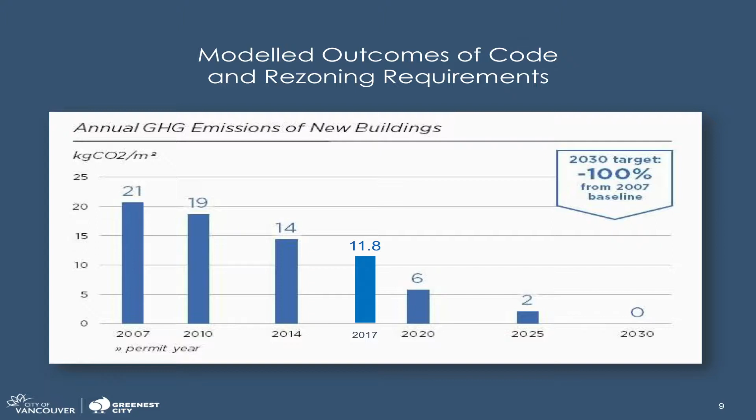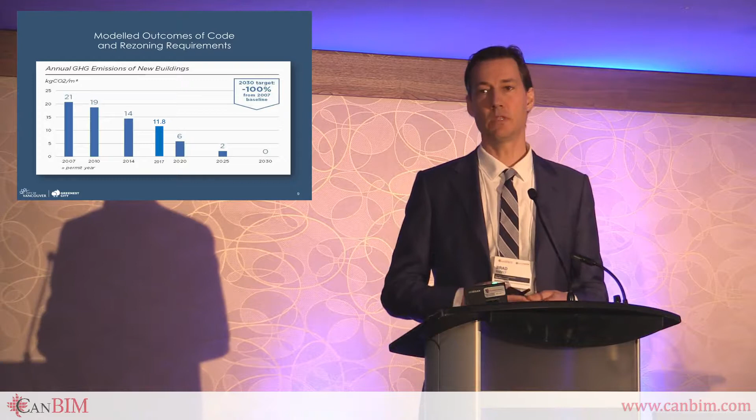And I'd say we learned a bit through those changes. Those were primarily regulatory changes that didn't have some of the support that we're hoping to roll out through the Center of Excellence and other tools, which I'll speak to shortly. The 2017 rezoning policy, which I'll describe a little bit, brings us down below 12 kilograms of CO2 per meter squared, so we're getting closer already. So we're tracking down already. It's really how do we continue that, and we're undeniably getting into the tougher stuff now. I'd say we've knocked off kind of the easy stuff. We're getting into tougher stuff, but we are on a trend at this point.

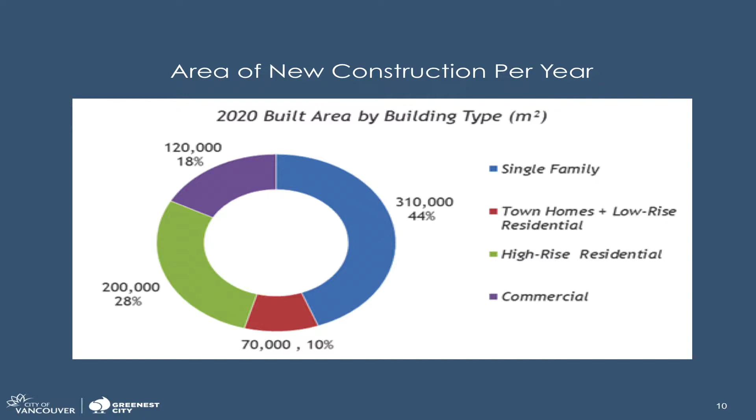That will change over time. As we densify, that's going to decrease, but it's worth noting that it's there today. 10% is low-rise, 28% is the high-rise tower construction that we're seeing, and then commercial, and I believe that includes institutional, is the last 18%.

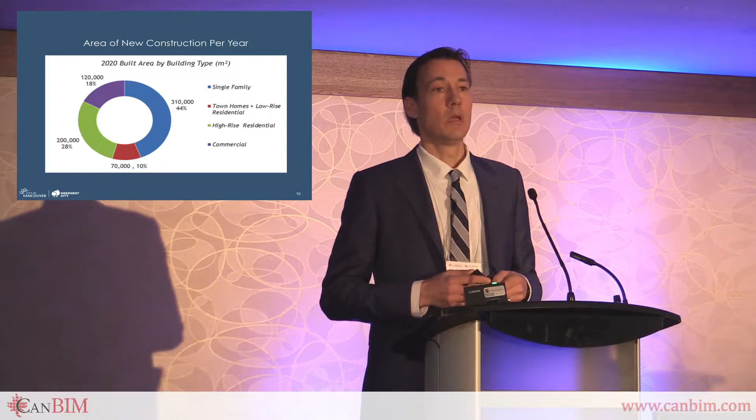We've seen innovation in commercial, I think, happening for some time now. I think owners and tenants are demanding it. People recognize the connection between productivity and a good building. People want to market that building to their tenants. So I think commercial has been progressing quite well in terms of its innovation. The taller high-rise stuff has not.

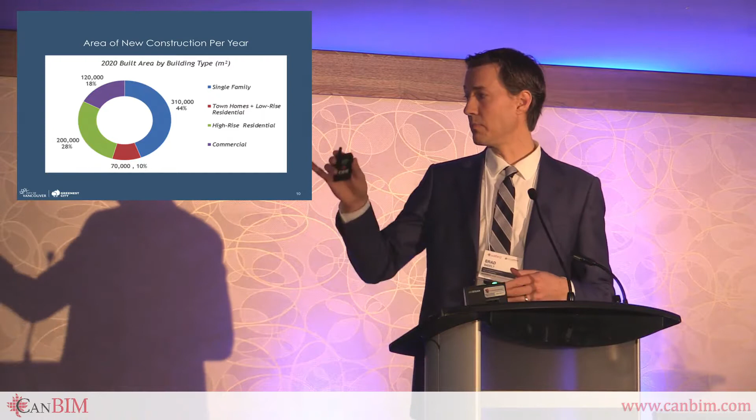There hasn't been that marketing ability with high-performance tall buildings, and so there's a real innovation gap in probably 38% of that circle, the low-rise and high-rise residential. There's a huge opportunity for BIM there. We need to have BIM if we're going to hit the targets, particularly on those built forms.

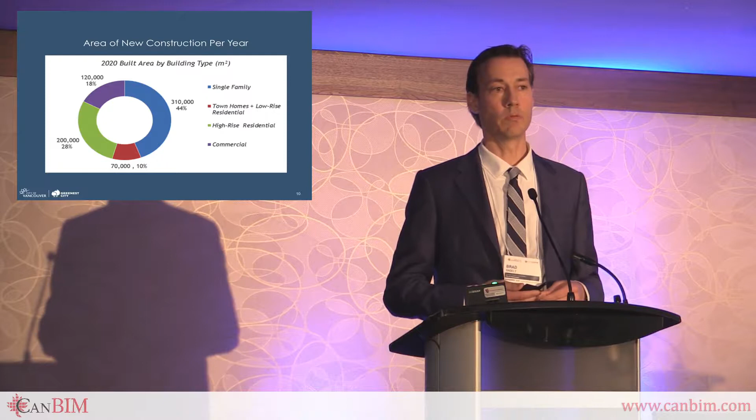So I'm going to talk about the zero emissions building plan, which gets into a little bit more of the nuts and bolts of what's rolling out now and what's going to be rolling out in the future and how that connects with BIM and drives the need for BIM. So the plan that went to council in 2016 was modeled off of examples we've seen elsewhere. Brussels is one that it was modeled off of, and I'll speak to that towards the end of the slide deck. But it really has 4 components.

One is regulation. But it's a little different in 2 ways. One, we've regulated in the past, but we've tended to regulate in isolation. We come out with a new code change and that's it. In this case, we're regulating, but we're also signaling where we're going in 10 years from now so that nobody should be surprised when the regulations continue to roll out.

The second piece is we've changed our regulations around energy efficiency quite dramatically. We've shifted from an ASHRAE requirement, which focuses on energy cost efficiency, to focusing on greenhouse gas emissions per square foot, heat loss, and energy intensity. That's a huge shift. We think we're the only city in the world at the moment to be regulating greenhouse gas emissions. Toronto recently picked up on it, and I think they've incorporated that into their zero emissions plan.

Heat loss, though, the provincial step code speaks to heat loss and very much aligns with our work, as it does with energy use intensity. So this is the future, I would say, of building performance. But it was quite a shift when this rolled out in our rezoning policy. But it directly speaks to BIM because this is all about building envelope and ventilation.

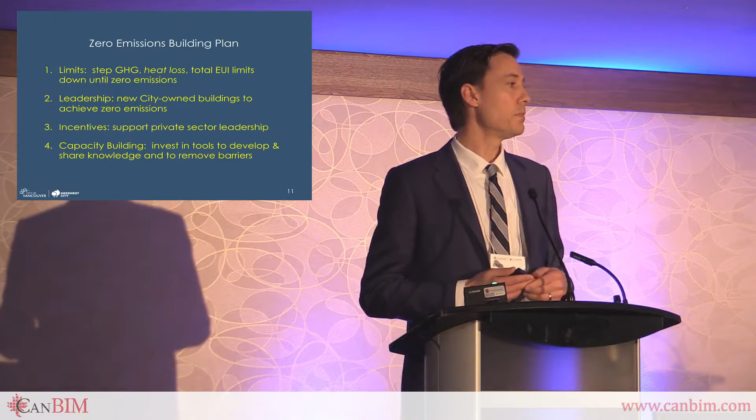The second piece is city leadership. The city is committed to build all of its new facilities to a passive house-like standard. When we rolled out LEED all those years ago, the city likewise committed to, I think, a LEED Gold standard back in 2009.

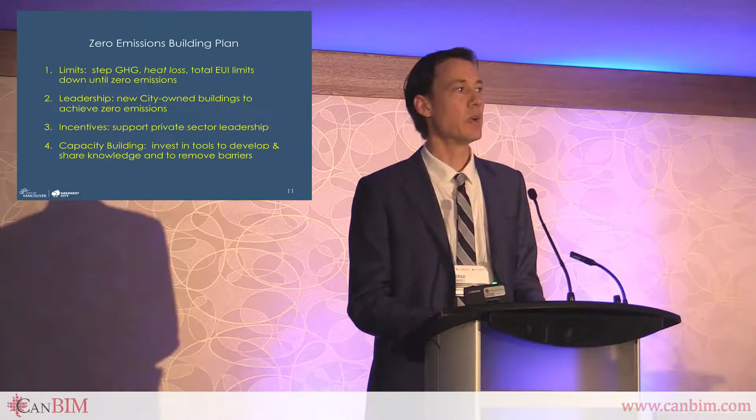The third one is incentives. We have an expression, it stems from supporting innovation, called feed and follow. Feed the leaders and follow behind them to pick up the crumbs. Figure out what they're learning and figure out what barriers they're running into. So we're looking at ways to catalyze and incentivize the folks that want to build this stuff because they're out there right now. How can we keep opening doors for them to keep charging ahead and then sharing their learnings?

And the fourth piece is, I guess, the follow part of that feed and follow equation. How can we build capacity? How can we shift from kind of the 5% early adopters to an early majority building zero emissions buildings really fast? And that's something that we have not done in the past. We've let the market sort itself out and figure it out. If we're going to hit 2025 or even 2030, we need to play a much bigger role to get that early majority building them so that we can then regulate.

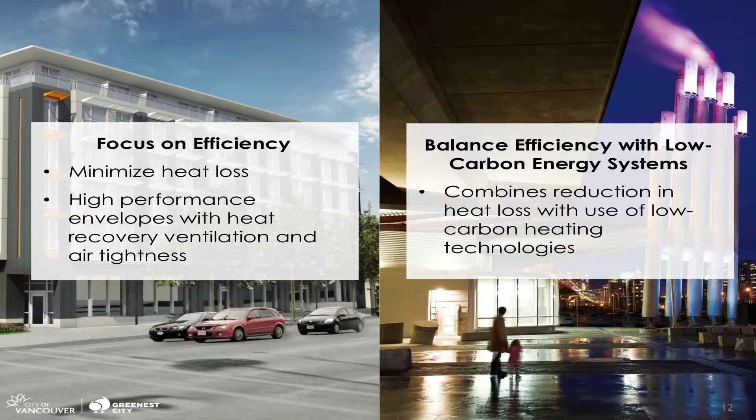So I'm not going to spend much time on this slide. There's two pathways to meet the city's new requirements. There is the envelope pathway, I would call it, the focus on efficiency, building a really good building with a great envelope and a great direct ventilation system that meets our performance outcomes. This is, I would imagine, the majority of the cases going through our rezoning will follow this pathway.

The second pathway we describe as a balanced approach, so we're still getting a very good building envelope, but it's combined with a low carbon energy system. So we're allowing technology where it makes sense to do so. In certain built forms, in certain locations, it just makes sense to use technology to meet the outcomes. But both pathways will have the same outcomes, the same goal guiding them.

The other piece I would add to this is right now there's two pathways. If we're going to hit truly zero emissions, both pathways will be required. So a great envelope combined with a low carbon energy system when we truly hit zero.

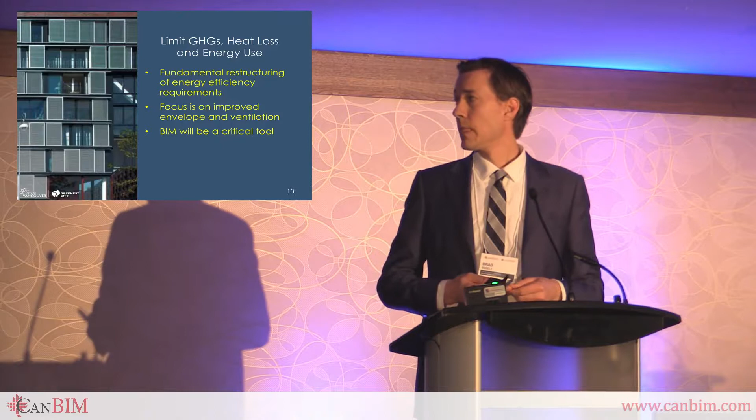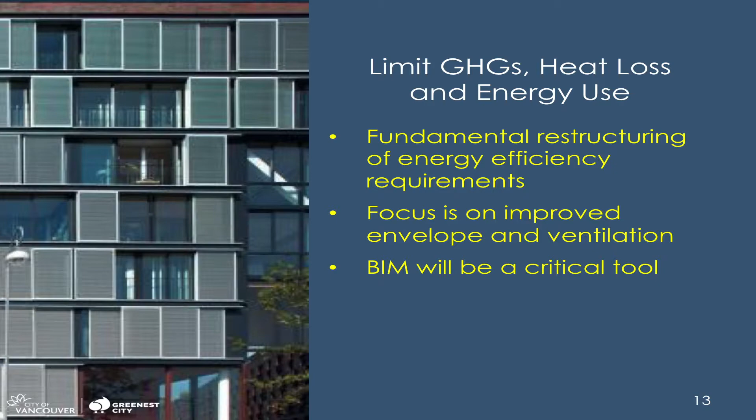So this here is one of the strongest connections with BIM. This is the limitations on GHGs, heat loss, and energy use. So the focus here is on building envelope. ASHRAE in the past really focused on electrical conservation and mechanical systems. Electrical conservation, so fixtures, lightings, those things have a short lifespan. Mechanical systems can work great. In a residential building with a strata, a complex system can work not great at all.

This process here is going to bake in a really good envelope into that building, really good windows. That's the stuff that lasts for 50 years in a building. So we're setting that building up for success. But what it's going to require is energy modeling. It's going to require a good air barrier. It's going to require good construction coordination. It's likely going to require prefab construction.

All this stuff links directly with BIM. It's going to be highly unlikely on the high-rise buildings that developers will be able to hit our requirements without using BIM and using it in a more comprehensive way.

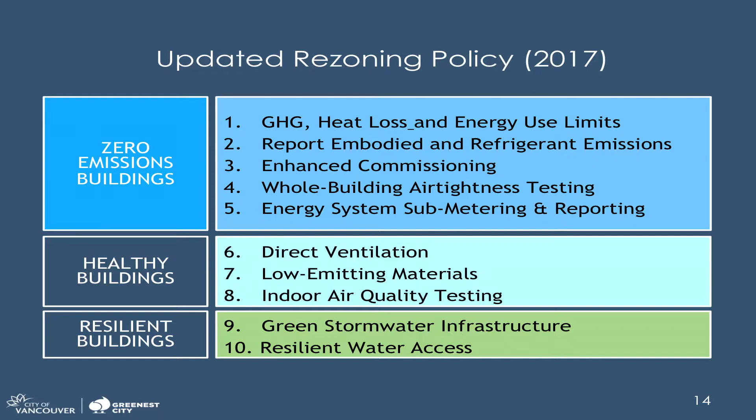The second piece is we now require embodied energy to be reported. We're the only city in North America to do this, the first city to do this, and I'll speak more about it, but this is the future, the next step of where we're going with buildings. As energy use comes down, embodied energy becomes much more important, and again, there's a good BIM linkage with that.

Enhanced commissioning, so we're borrowing really from the last version of LEED here, but commissioning continues to be an important piece of the rezoning policy. The air tightness, I'll give an example shortly, but air tightness is becoming really, really important. And at the moment, our understanding is it's not necessarily well coordinated through the construction. A lot of people touch the air barrier.

Energy system sub-metering and reporting. This is kind of dipping our toe into benchmarking is what this is getting at. So buildings that go through the rezoning process will require sub-metering. They'll be reporting out their energy usage. It's that sort of information that we can feed into our center and share with folks like yourselves in terms of what's working and what's not when these buildings actually get running.

There's a number of other requirements. What we've done is essentially borrowed the stuff from LEED that we found was still valuable, but really focused on the stuff that we think is critical for achieving our goals here.

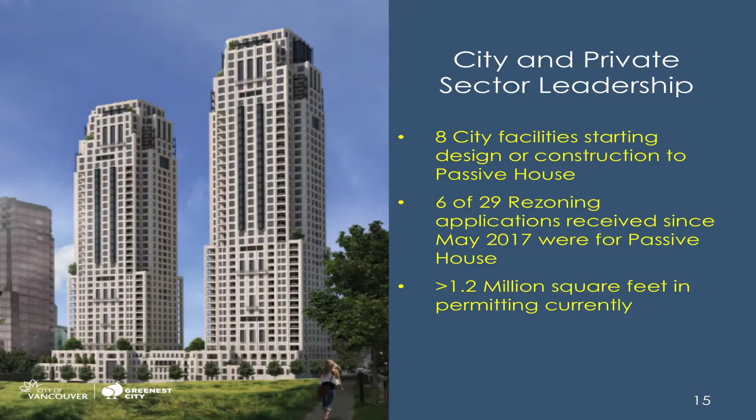And we're seeing that. So city-led projects, we've got 8 projects in the queue right now at various stages pursuing passive house or a passive house-like standard. We've got a big fire hall under construction, a number of other ones. This is fantastic. Our real estate department has really bought into this process. It's the second number, though, that's really exciting.

So since the rezoning policy came into effect last May, 6 of 29 applicants, 20%, are voluntarily pursuing the passive house standard. They're saying, we have to hit this energy performance requirement anyway in the rezoning, let's just go all the way and do passive house. This is huge for us.

We've got 3 towers that are in the works at the moment in the kind of inquiry early rezoning process. If those towers land in Vancouver, we will undoubtedly be the lead in North America on passive house construction. So it's exciting to see those early adopters are running with this already. And over 1 million square feet currently in permitting, and we've had some construction already on this. So just to emphasize, this is happening already. This isn't futuristic, it's underway, the change is happening.

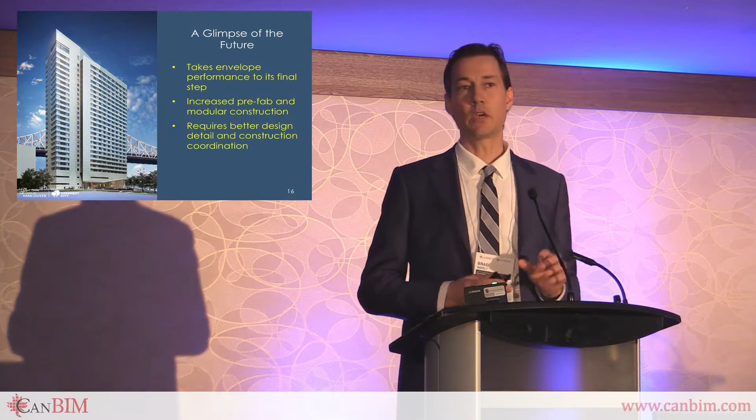So a glimpse into the future. This is the building built at Cornell, the tallest passive house building in the world to date. It's 26 stories high. It generated quite a bit of buzz through its construction and completion. A few takeaways from this project. So building envelope, again, is critically important. There was a lot of use of prefab. Prefab wall assemblies were critical to this building, and I think they will be for virtually any high-rise that's going to hit passive house.

The second thing we heard from the folks at Cornell is that the air barrier was a nightmare. The air barrier testing, even the taping with different surfaces, cold weather, warm weather, all the different trades touching that air barrier, ensuring that it was performing as it should be was a nightmare. And one of the learnings is that coordinating the air barrier installation and the inspections throughout the process is critical, because I think it cost them a lot of time on this project.

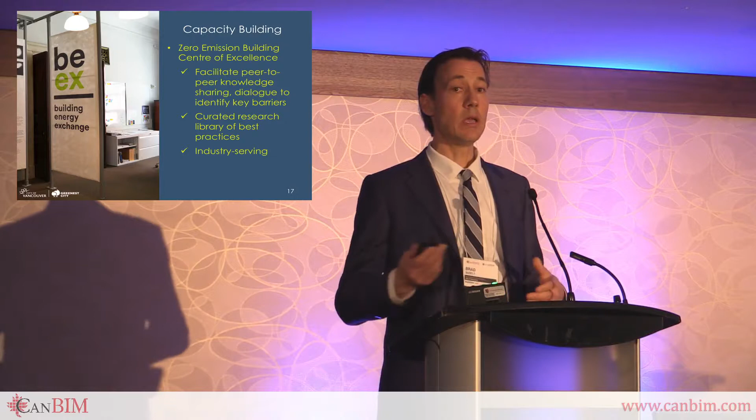A second example, very close to home, a passive house project. They brought in an HRV system and ducting from, I believe, Europe. The BIM model wasn't fully connected, and it turned out that the ducting did not fit well within the building itself. It took a lot of cutting of drywall and a lot of jigging to get the ducting into space. That's the sort of thing where BIM could coordinate and avoid a lot of headaches. And so I think the early adopters are seeing that, and through what we want to create with the center, it's an opportunity to share these lessons that people are learning already.

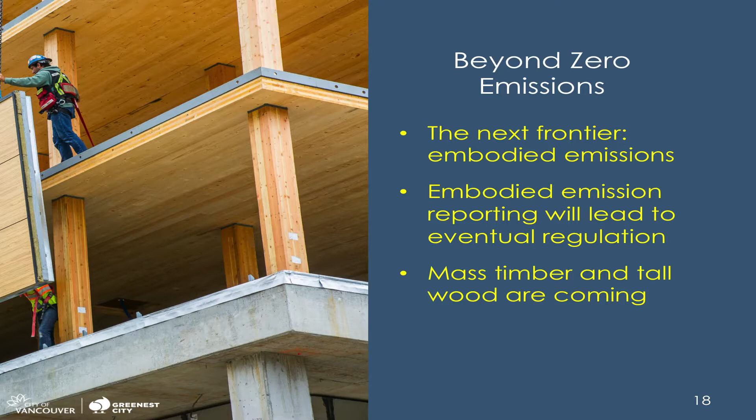So this is maybe the slide I'm most interested in, and probably most knowledgeable on. This capacity building is, we think, the secret sauce in what we're putting forward with the zero emissions plan. As I said earlier, we as a city, and I think most cities, have tended to regulate. We change the bylaw, we consult on the bylaw, and that's it. This is different. This is how can we support the industry to learn quickly. We've heard from early adopters that they want to share information, even lessons learned. They don't want to see others make the same mistakes, like that Cornell air barrier example. They're sharing that information, but we need a forum, a space for that to take place. And that's really what we have in mind with this capacity building piece.

So I'm really excited about it because we are in the process of entering into a contract with the Vancouver Regional Construction Association. We're very excited to have that partnership. It's such a great connection with the industry. Passive House Canada is playing a role in this. We have a job description up at the moment. We're aiming to have the center open in May. We think it's going to fundamentally change and accelerate how we do buildings here. And the real emphasis is not on me talking to folks in that space, it's on connecting builder to builder, designer to designer, modeler to modeler.

The second piece I would emphasize is right now I hear from the odd builder, the odd designer with barriers, with complaints, to put it frankly. We have no formal process for prioritizing or vetting those barriers. This center should do that.

I'll give one example. We've heard from frustrated architects that they do their energy modeling, they come up with a building design, they show up at our urban design panel, and we want the building more articulated. We want more window openings. And suddenly, that building envelope is changing dramatically. That's the sort of barrier that we need to fix, and that's the sort of barrier that this space is meant to air and then seek out solutions for.

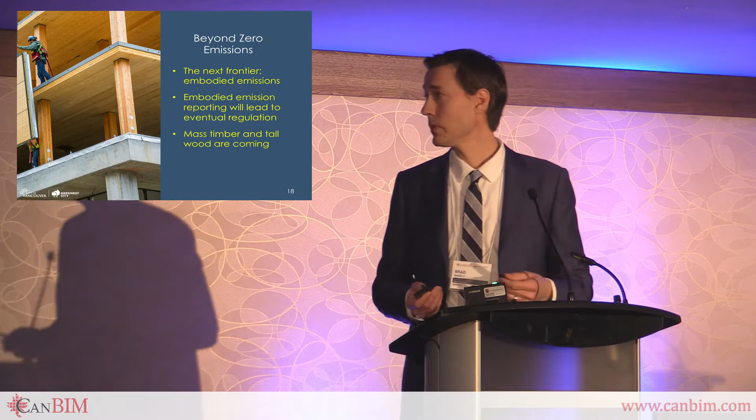I mentioned the zero emissions, kind of the frontier being embodied carbon. So we're the first city to require reporting. We're not regulating it, just the reporting of it. Reporting typically is the start of a future regulation. And the reason we're going there is as operating emissions go down, the embodied carbon in that building becomes more and more important. So look to it as the future.

Again, I know there's linkages with BIM. I know Autodesk has linkages here for doing embodied carbon. It is the future. Timber construction is likely a big part of that construction. There's huge local economic gains from that. There's embodied carbon gains from that. I'm sure many of us have been to Brock Commons. It's coming for sure, and that simple reporting requirement is that tip of the iceberg of that coming.

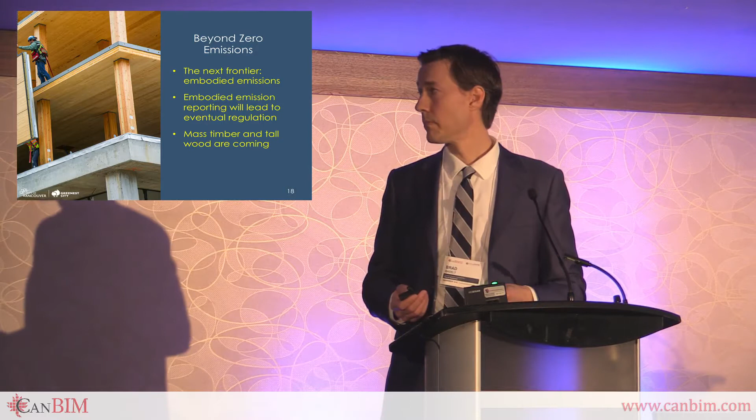So many of you may have heard the example of Brussels. Brussels in the early 2000s had one of the worst, if not the worst, building code in all of Europe in terms of energy efficiency. Brussels embarked on a program signaling early that they wanted to get to a passive house-like standard, which I imagine at the start must have seemed astonishing for this particular place. But they rolled out a program that I think has some really important ingredients.

One, they had a big pot of money, which we can't replicate, but they did have a big pot of money that incentivized near zero emissions developments, but they did it in a really interesting way. They rolled it out through a competition. And the competition wasn't all about energy performance. It was about performance. It was about cost effectiveness, replicability, and aesthetic quality. The buildings had to look good.

So they handed out a lot of money through this competition over a number of years, hundreds of buildings. It built a lot of prestige for these buildings, and it changed the perception from these are ugly buildings to these are really high prestige, beautiful looking buildings that can do a lot of different things. They also made sure that when they gave out the money, there was strings attached to it. So the developer didn't just go off and build a building and that was the end of the story.